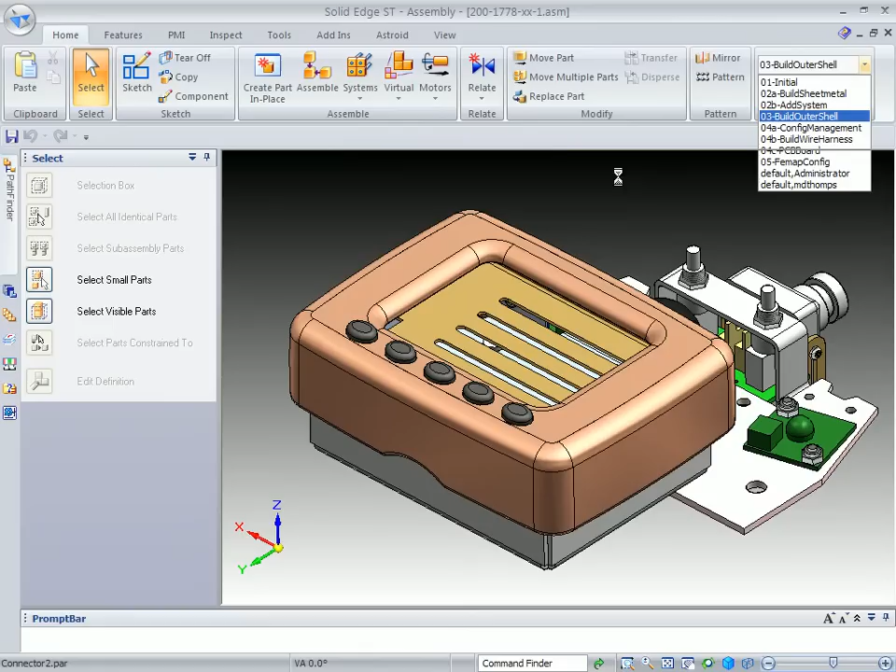The next portion of the demonstration, we're going to build the console cover for this particular unit. In order to do that, we're going to go to a configuration called Build Outer Shell, and we're going to use some of our surfacing techniques to actually build this particular design.

Here you can see it turns on several parts from the actual assembly. Then what we want to do is simply identify the console housing, and we'll in-place edit into that housing.

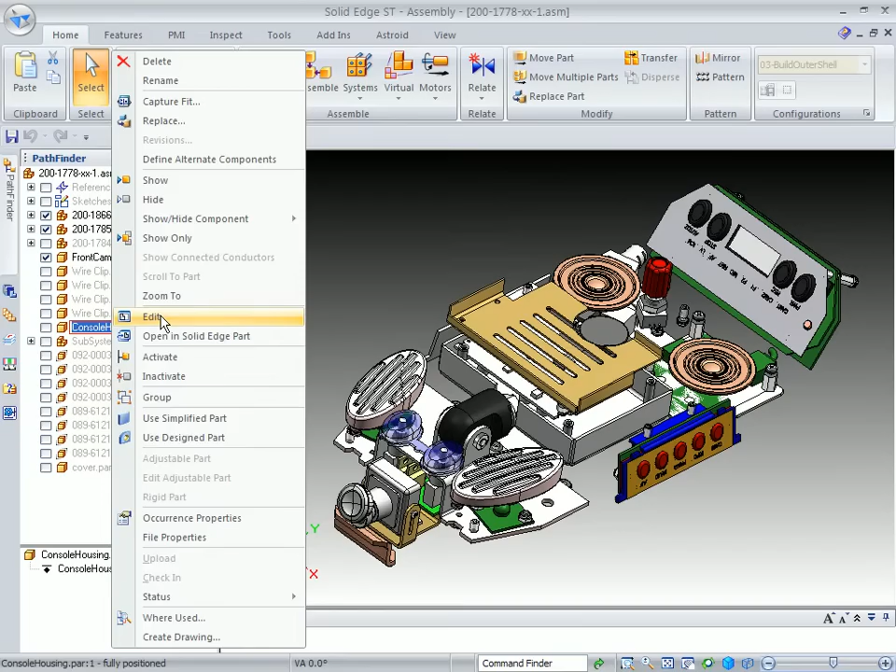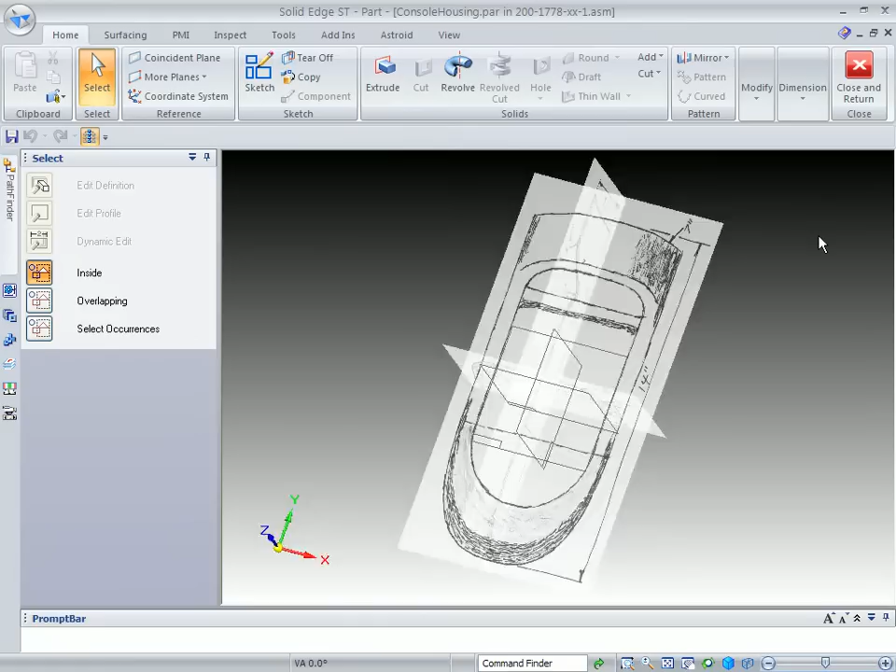Now when we do that, you're going to notice that we've got some industrial design sketches. If I turn off the background components, you can see them from a top view, a front view, and a right view. So he's got somewhat of an idea of what he wants this to look like, and we can go ahead and begin our design by simply creating the base feature.

In order to do that, we'll simply use a parallel reference plane and pull it down to this line to the front of the part here. It kicks us into the sketching environment where we will begin sketching.

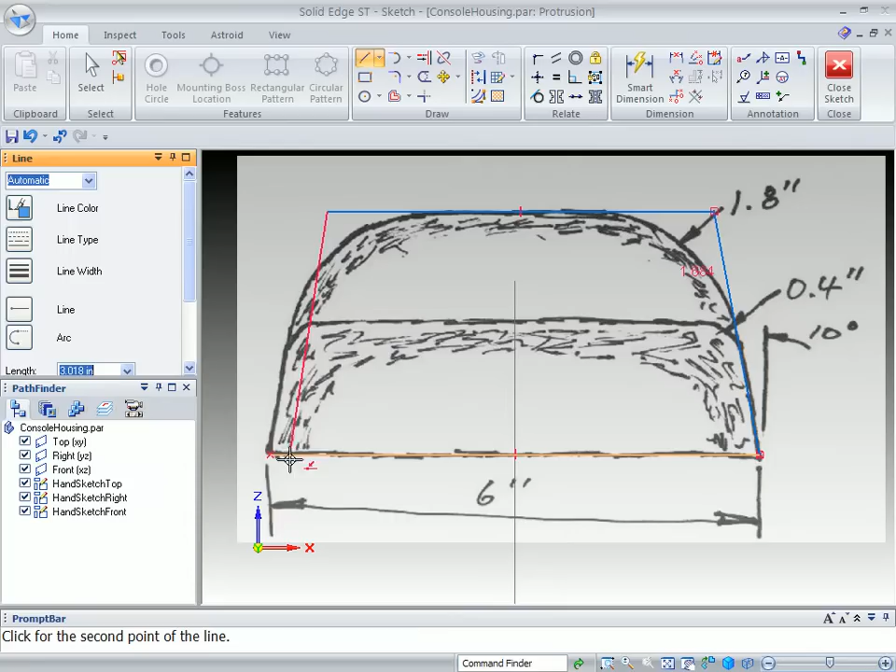What you want to do is get right on the reference plane and just come out to the end and start sketching what this part's going to look like. So you go to the endpoint to make sure you have a closed sketch. Then we can go ahead and lock in to midpoint, and start attaching some dimensions.

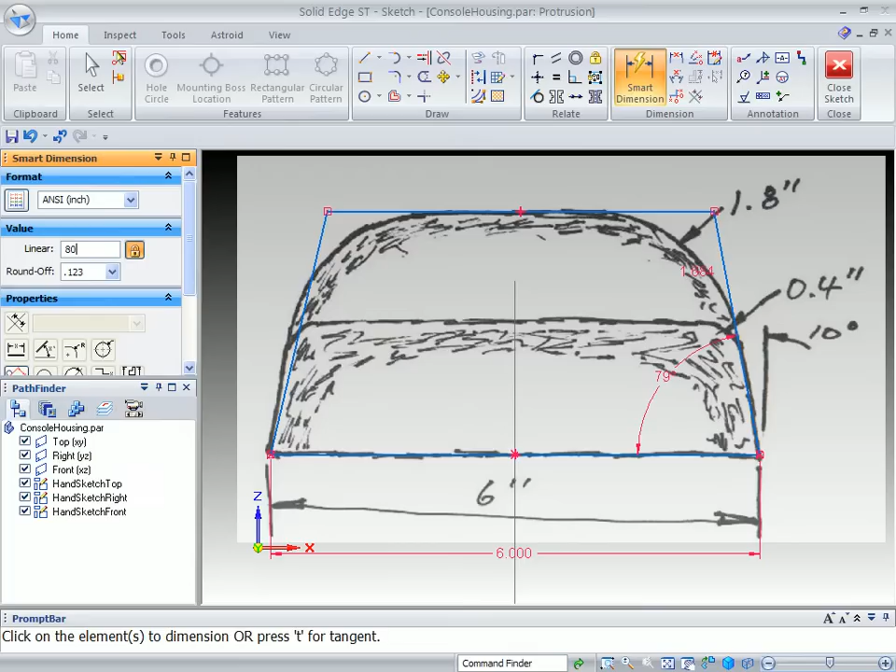We also want to add an angular dimension, and we can do that. And then we want another angular on the opposite side. Of course, there's a couple ways to achieve this in the sketch environment. And then we want to add a dimension to the side.

We'll go ahead and make that 1.8 inches. Once we have our sketch kind of roughed in, it takes us back to the top level, and we're going to go ahead and pull this up about, let's say, 9 inches.

Now that we've created that, what we want to do is come to a side view, and you'll notice that we also need to remove material from the side. For that, we'll use the cutout command. Again, these are just some general commands to get our shape kind of roughed in.

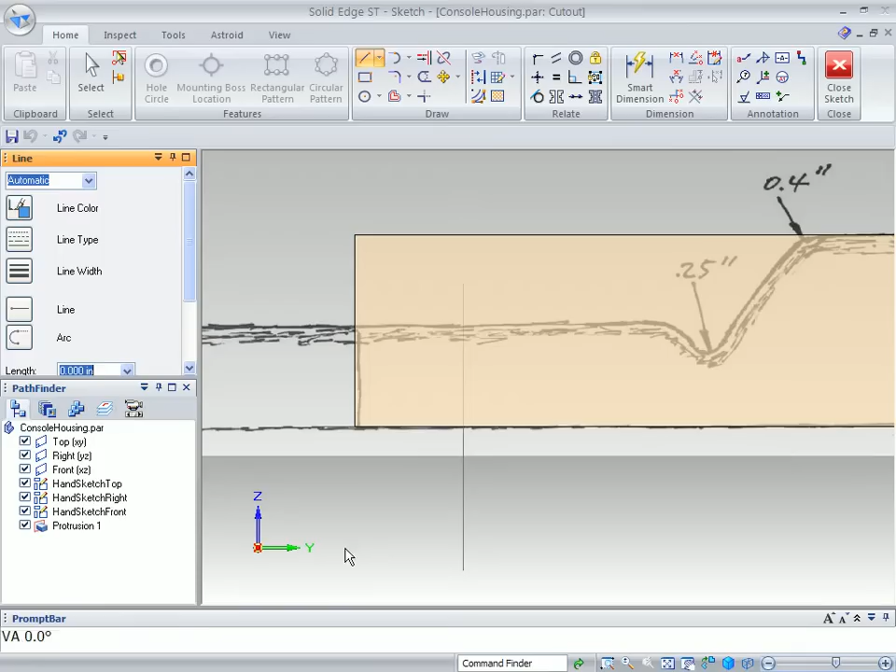Make sure you don't pick up midpoint here, just get point on and sketch your lines. What we want to do is remove material from the top half, and we'll use the through all option and put the arrow in both directions to quickly remove that information.

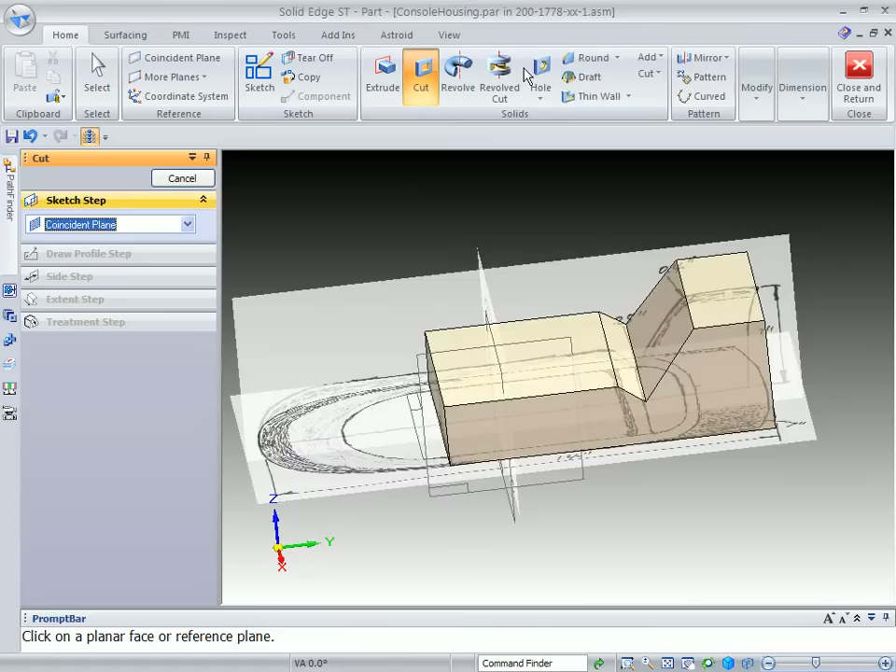The next thing that we want to do is add a couple of rounds. For this top round, we want this to be 0.4. Then for these bottom two, at least from the sketch, it shows a 0.25, so we'll go ahead and create those. And then we need to create 2 on the side, and those also need to be 1/4 inch, or 0.25.

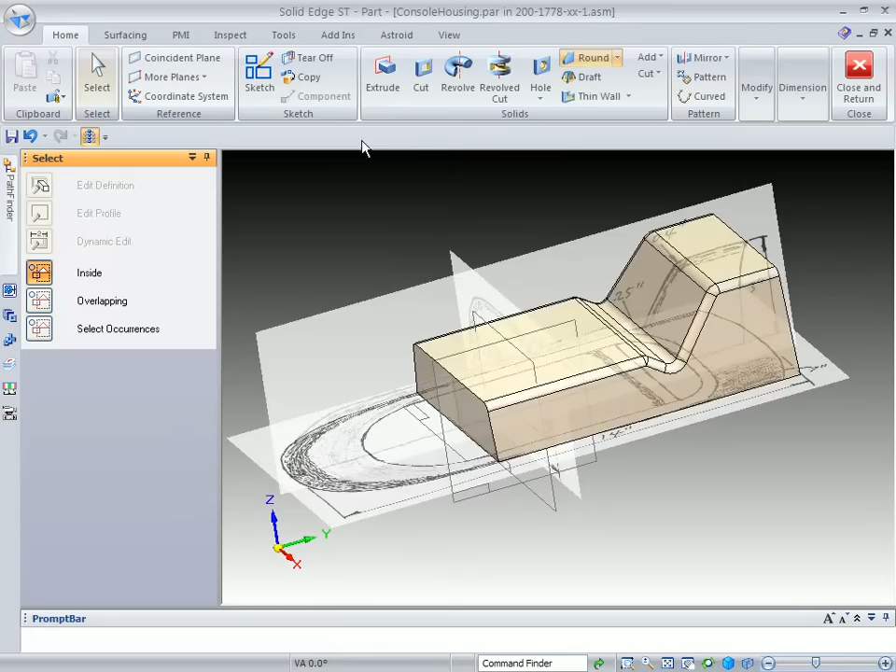This gets us very close to the general shape, and now as we take a look at the top view, we have somewhat of a bullet nose that we need to create here. In order to create that, we're going to use some curves and then BlueSurf to develop a surface there.

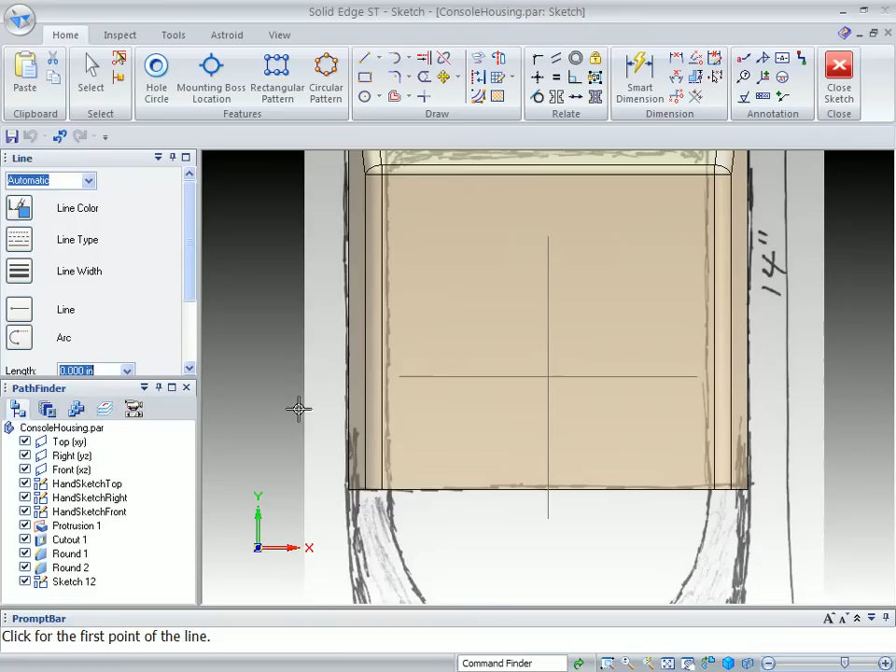So the first thing we'll do is use the sketch command to identify the top reference plane, and it takes us again into the sketch environment where we will begin sketching with the curve command.

What you want to do is first go to the outside. We'll get the endpoint, make sure you get endpoint, and then click a couple of times to place a couple of points, and then go down and get the midpoint, and then want 2 points on this side, and then go up and pick the endpoint.

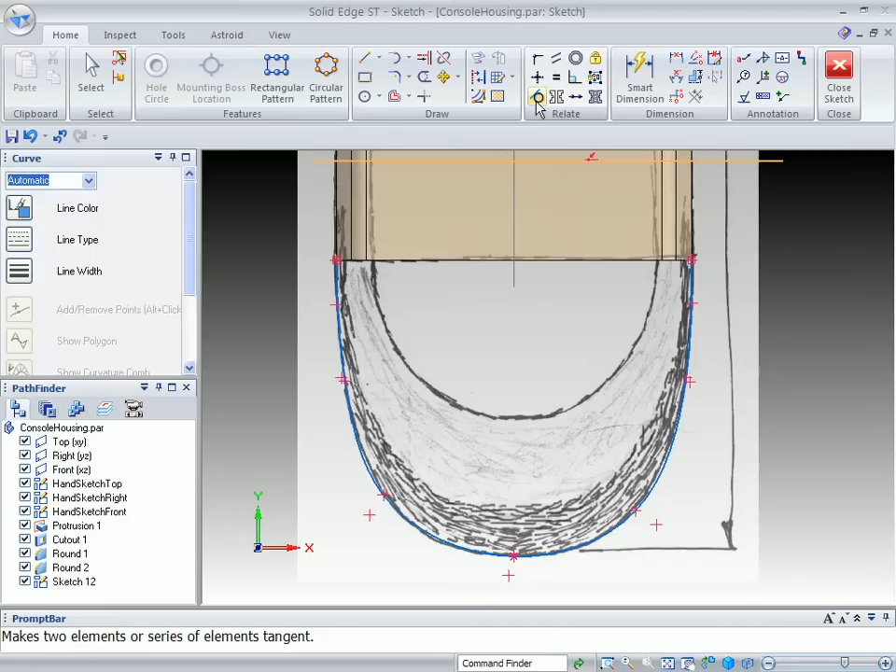The next thing that you'll want to do is use the tangent option to make sure that these lines are tangent and nice and smooth.

Then what we're going to do is pick up not the control vertice, but the control point on the line, and draw a line between those 2 control points.

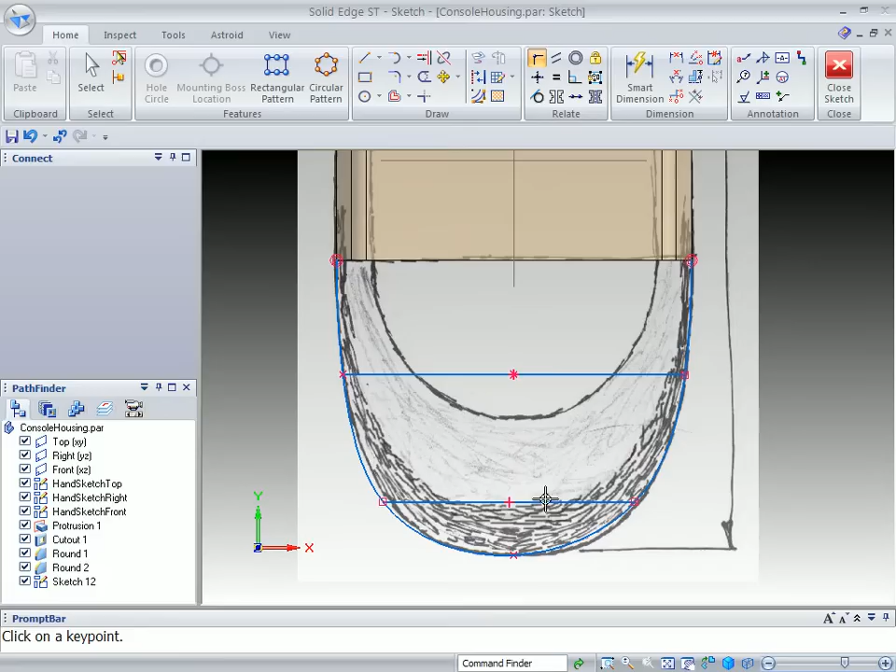For the 2 lines, then what we want to do is use horizontal vertical, and then point on to get midpoint to the center on both lines very quickly. And you can see that develops a nice curve, and it should be tangent.

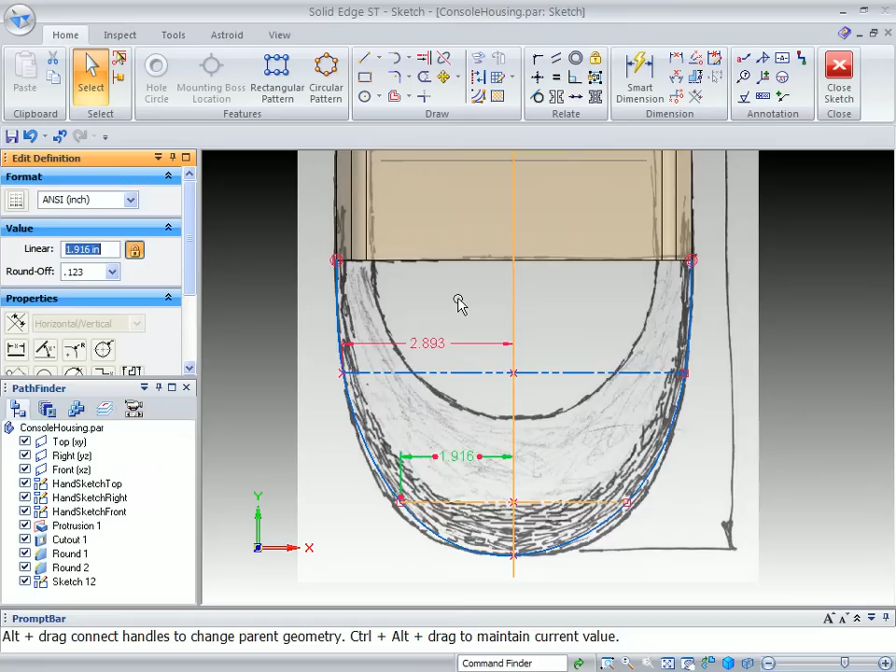We also want to convert these lines from lines to construction, and then we can easily place a dimension just to show you that it is indeed tangent. So for example, if I take and scroll this, you're going to see that it is symmetric on both sides. Okay, so that looks good.

So what we can do is go back and go ahead and begin developing the next shape.

For this, we want to use parallel off of the top reference plane, and we want to come and pick up the bottom arc. So if I zoom up a little bit, you can see it better, and I'll pick up that end point of that arc.

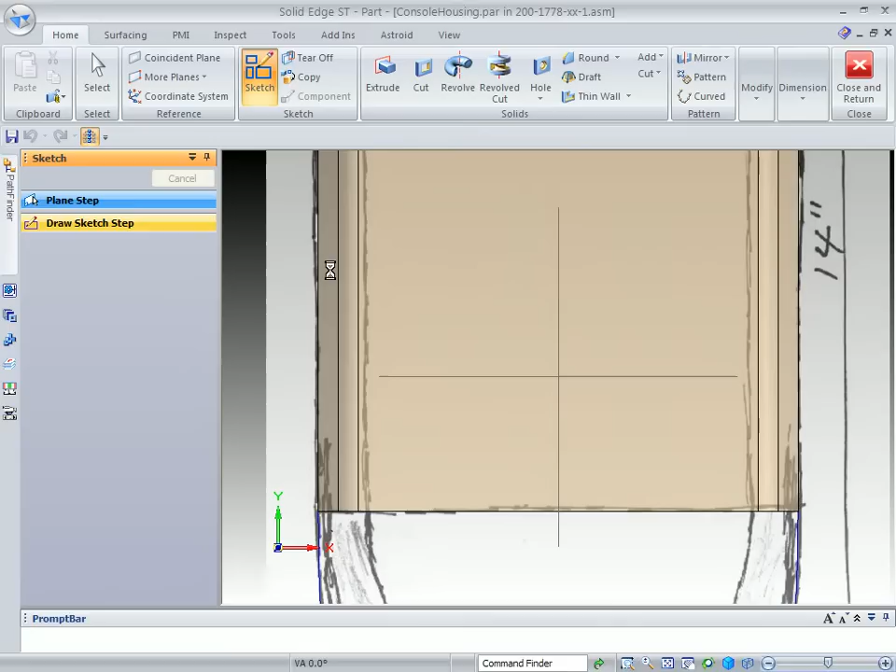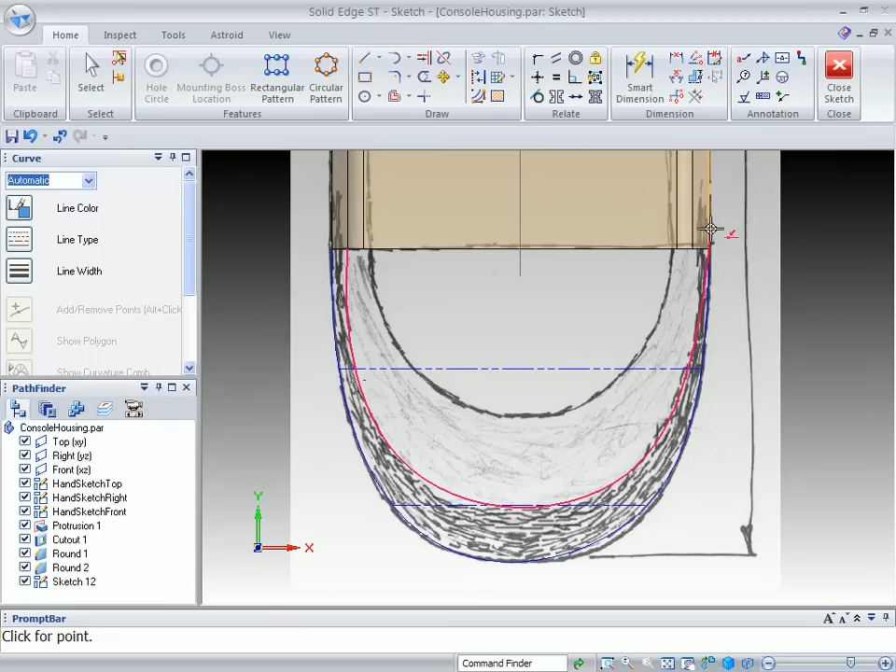And basically we want to repeat the steps that we just did by picking up the end point, 1, 2, 3, 4, and then another end point. Then what we want to do is get these tangent,

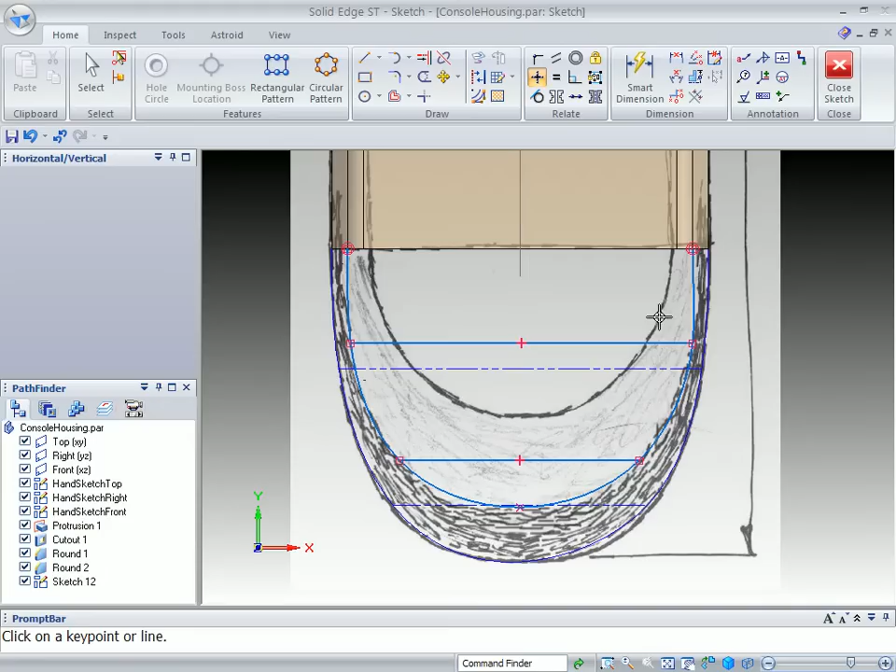and then we want to develop from the control points 2 lines as we did before, and then we want to make them horizontal vertical to make sure this is concentric on both sides, to each side, and then we want to convert those.

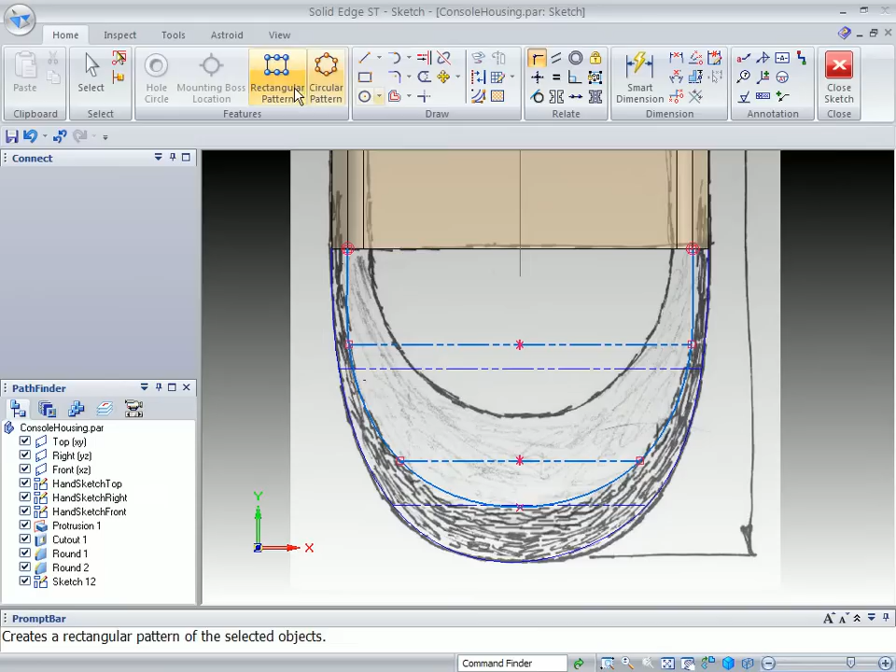And just to show that they are concentric, if we move them, you can see - oh, well, one thing we forgot to do is do the point on to center, and then they will be. So now when I grab that end point, you'll see they both move as it should.

Okay, so that looks pretty good. Now we can go and create or develop the third curve, and for this I'm going to just identify this top face, and for this particular curve I'm going to use the tangent arc command.

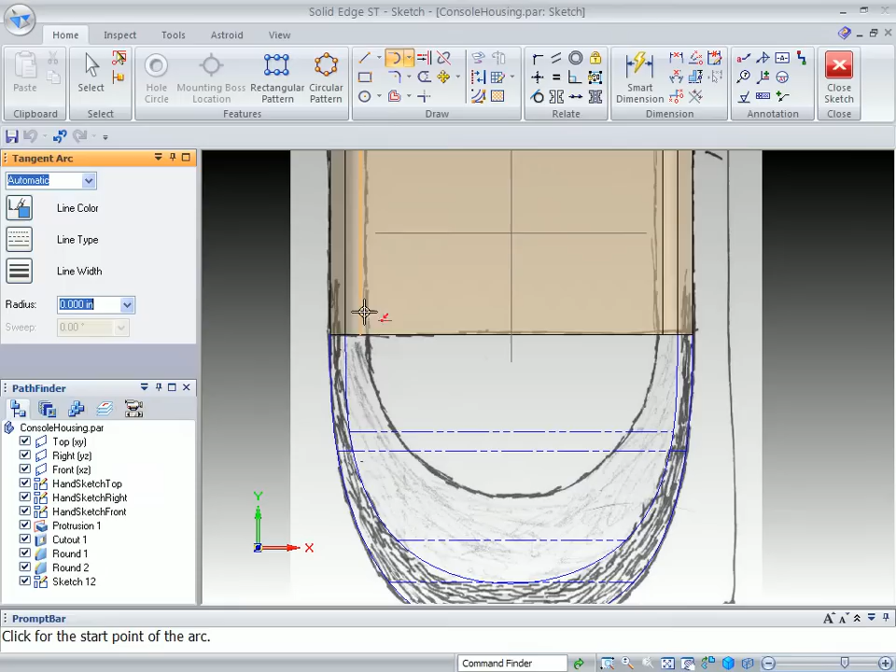Make sure you get the end point, and again get the end point. Then what we can do is simply select the curve and convert it.

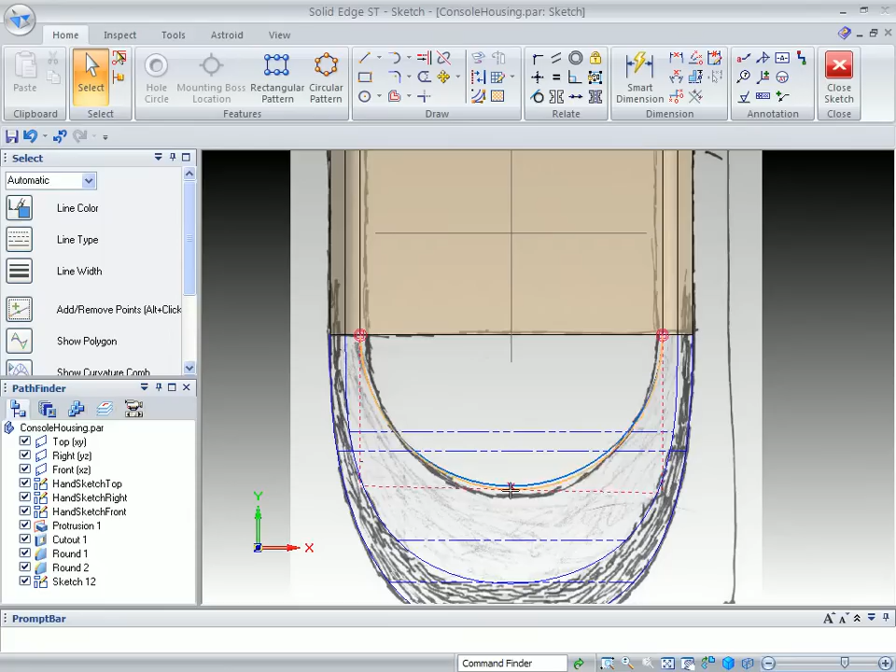We also, if we want, we can make sure that this is in midpoint. You can see that when I select the curve that it is indeed in the center. And so now we've developed our 3 guide curves.

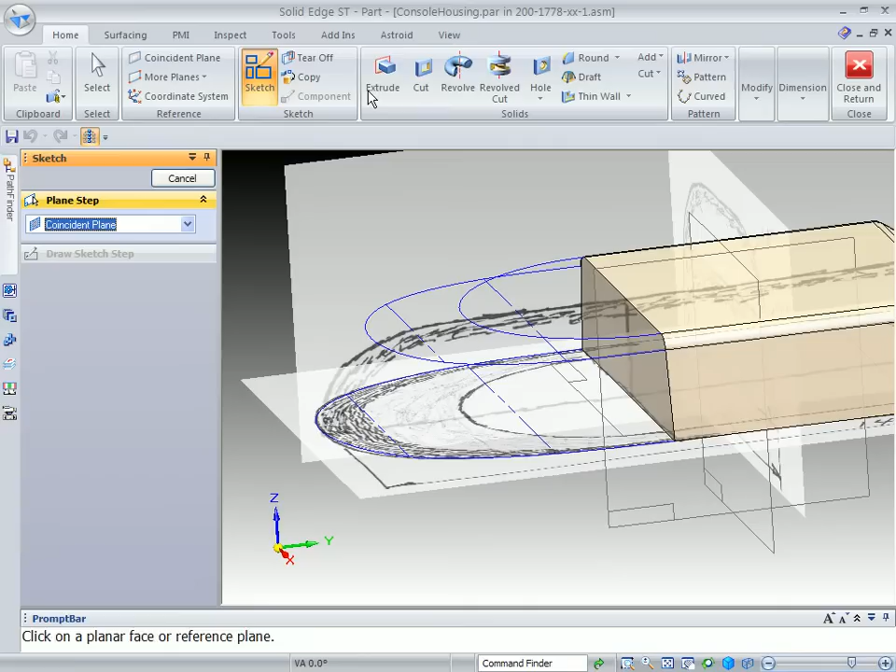The next thing that we're going to create is the curve down the center that kind of gives us this particular shape here. In order to do that, we're going to create another sketch off of the right reference plane.

And then I'm going to rotate it a little bit and use the curve command again. This way we can pick up the silhouette points.

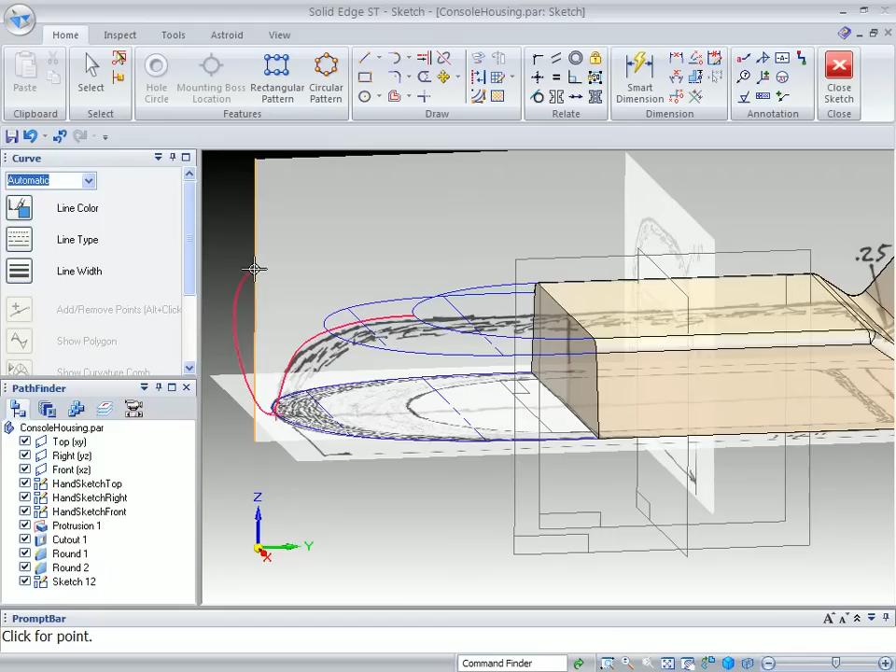Want to make sure you get the silhouette point. And then once we get the silhouette point, we also want to make sure it's tangent to these faces.

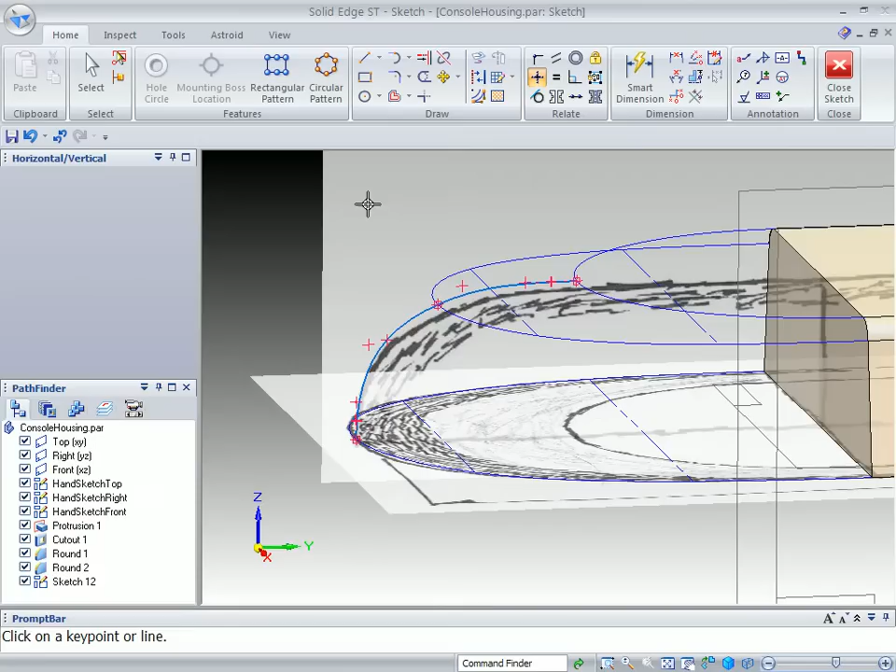So what I'm going to do is just basically identify the control vertice and make sure that they're square to the front and the top face. Then we can close and return back to the top view.

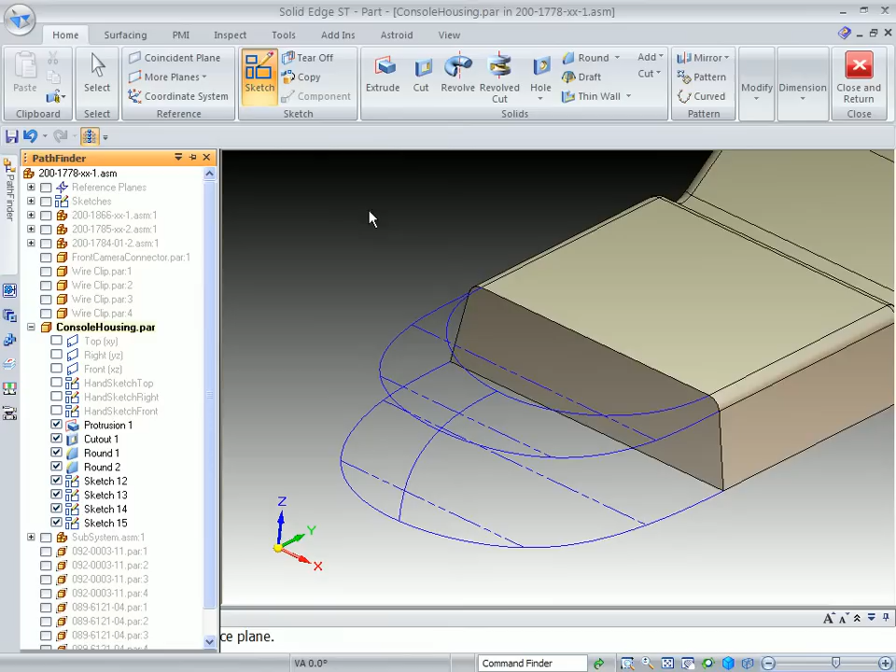Now what I'm going to do is simply turn off these sketches so that you get a better idea of what we're creating here. Then we can go and use a command called derived curve, where I can pick the bottom curve and accept it.

And then I also want to do a chain on this top one. So this whole front face, we're going to derive the edges from that face. That way we can use it in the BlueSurf command.

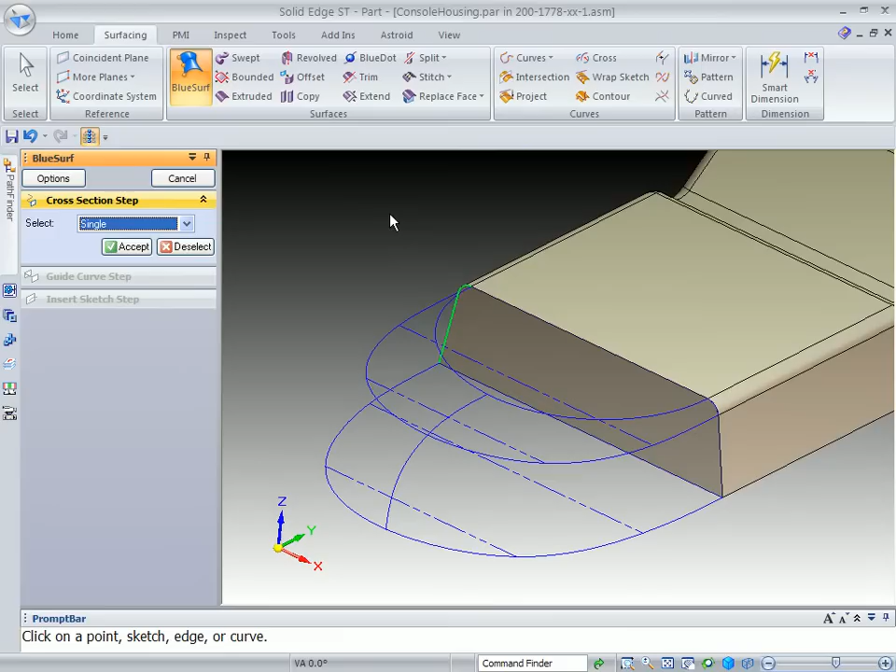I'm going to switch to single and simply select those 2 curves and then pick the bottom here. And then I'm going to come over and select these 2 curves, and then you can see that's going to quickly develop the first shape that we have.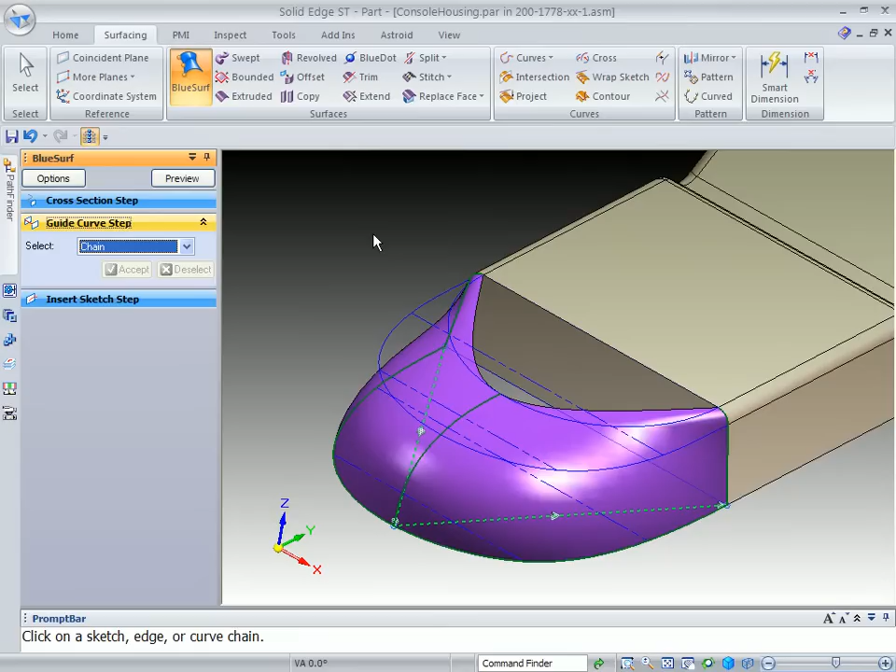Then what I'm going to do is go to the guide curve step, where I'm going to start selecting first the bottom curve and accepting it, and you'll see the shape update, or the surface update, to those curves as I identify them.

And there you have the shape that we're looking for. The next thing that we need to do is the bounded surface command to identify both curves on the top to close this surface out.

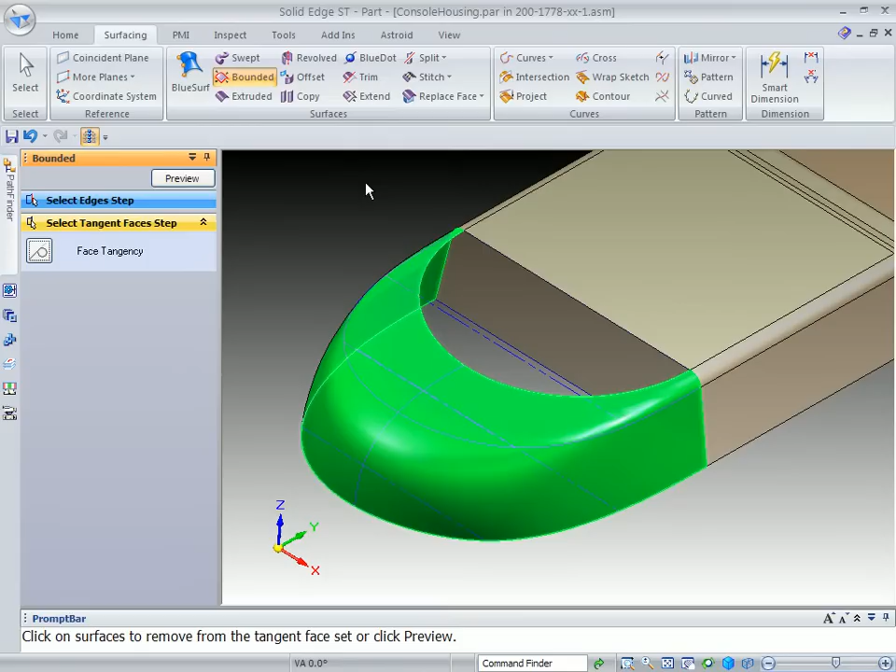And then we're going to do the same on the bottom. Once we've finished that, we want to go ahead and Boolean this, but before we do that, we actually need to stitch it by just fencing it in and accepting it.

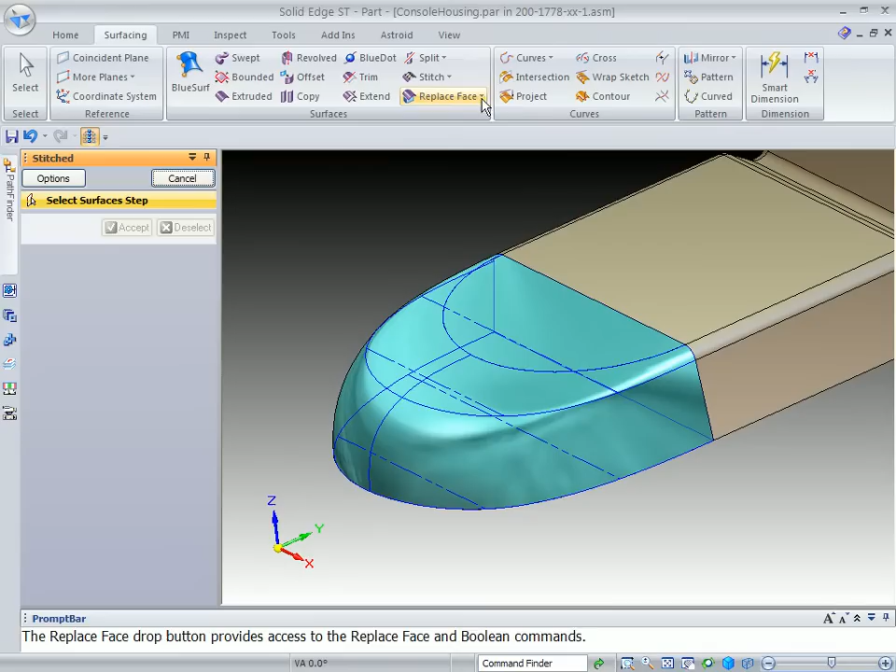Then we can use the Boolean operation and make sure you select the Unite, and it's going to go ahead and add that information in.

Then we can hide our sketches and also our curves. So you can see how easy it was to develop that using BlueSurf, and all we had to do is basically set up our curves.

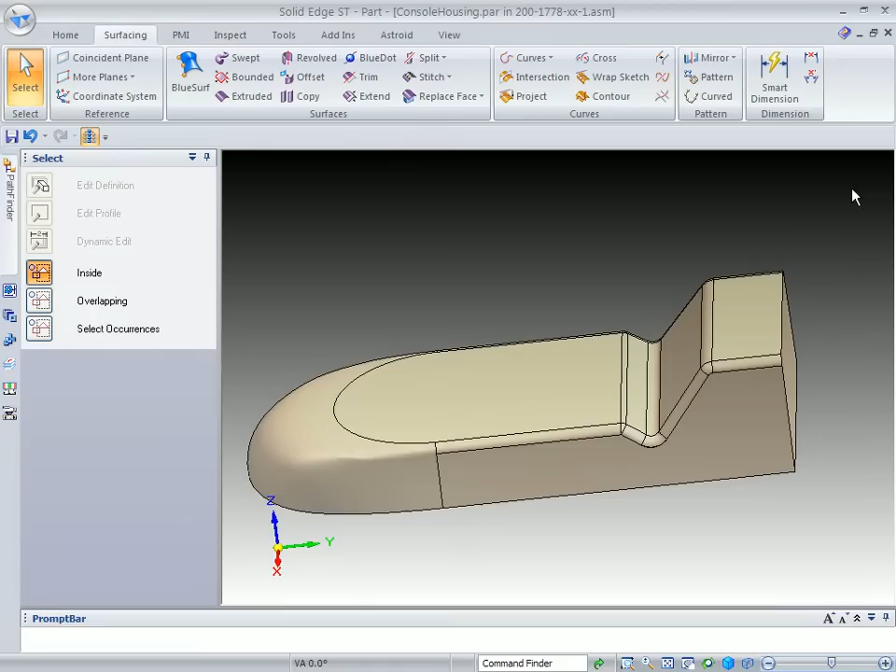The final thing that we need to do is come back over to one of the hand sketches here, and you're going to notice that the back side has a little bit of a curve to it. So what I'm going to do is go ahead and create another sketch, our final sketch of the day for this particular part anyway.

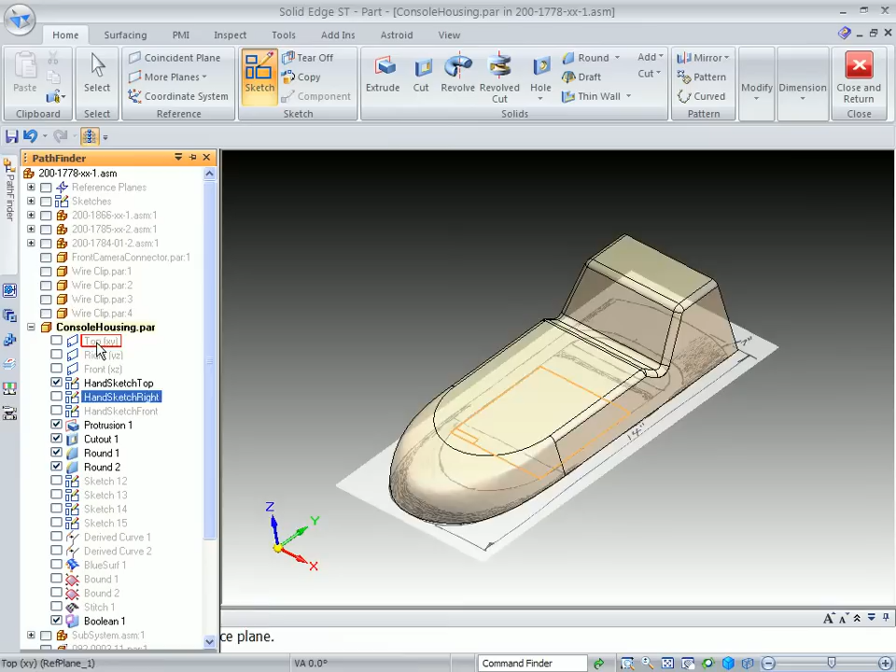Go to the top view, use arc by 3, and basically get an arc that's just a little bit above the edge here. And then what I want to do is go ahead - and it does show that it is a 7-inch arc, so make it 7,

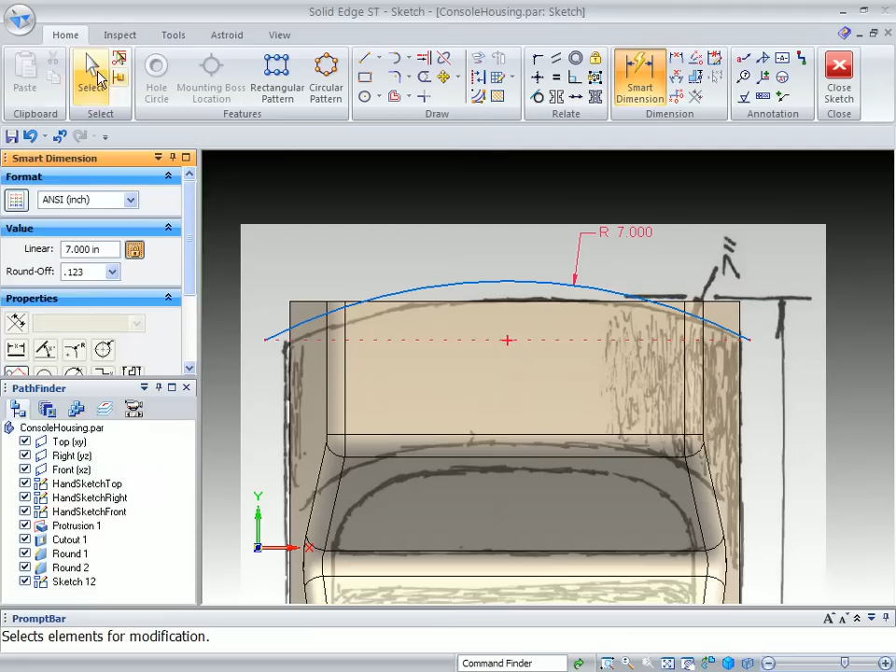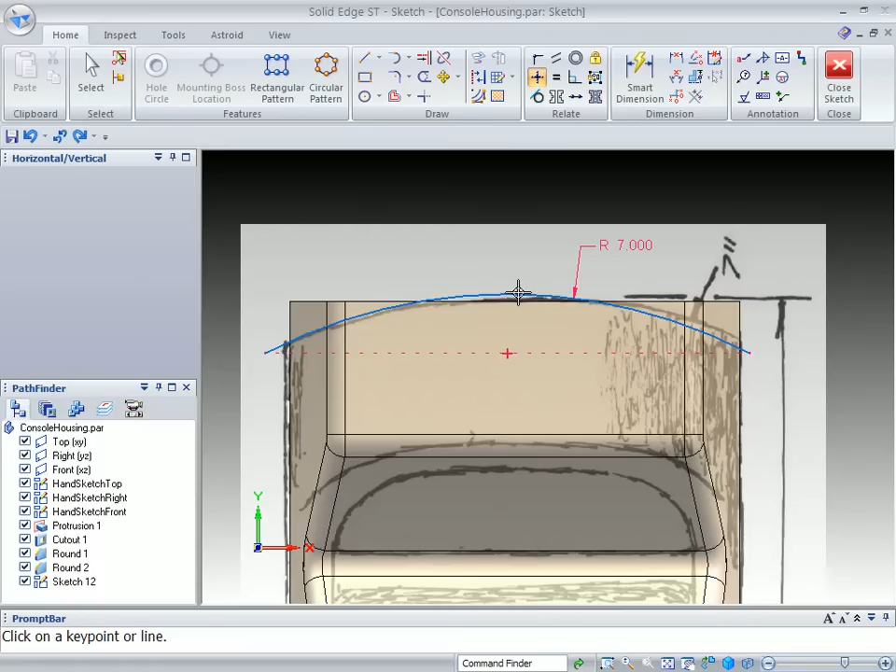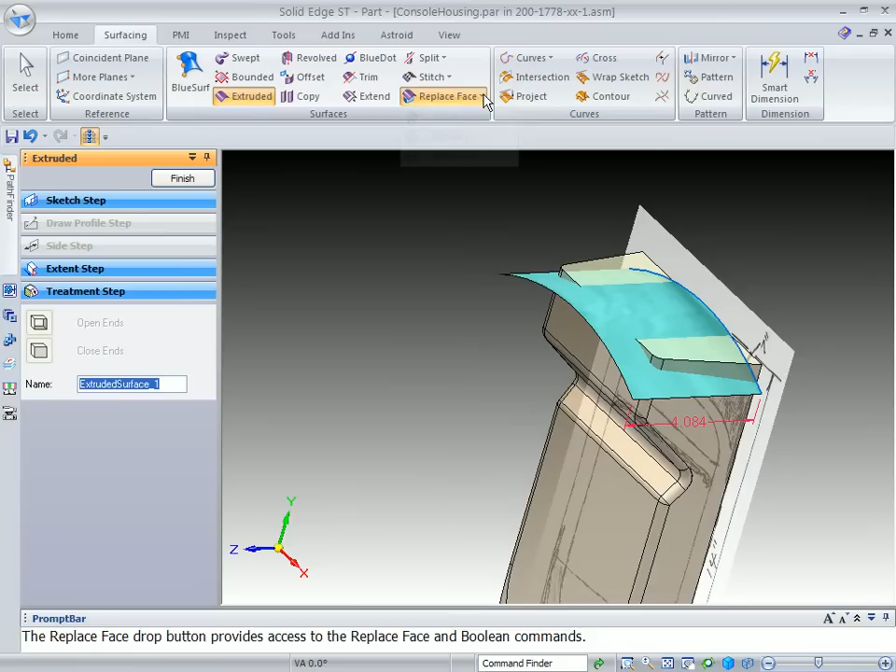and then close out. Now once we've developed that, then we can use the extrude command from sketch and just simply pull that face up. And then what I'm going to use is the replace face command to select this back face and change it to the surfaced face.

So again, a nice command that allows you to replace the surface. So at that point I can go back and remove or turn off the sketch.

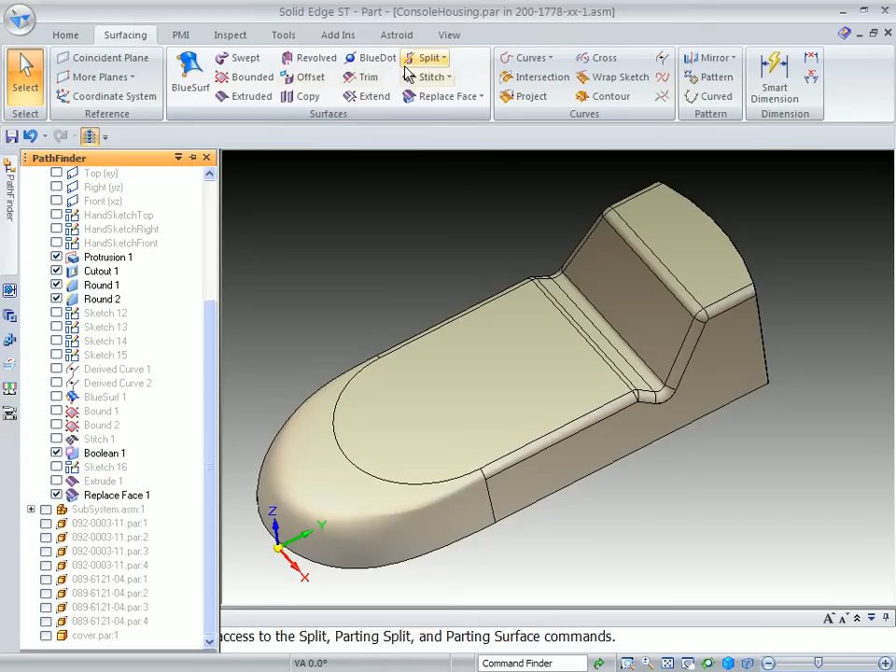And then the final thing that we want to do is to go ahead and add a round on the back side, which is going to be, again, 1/4 inch.

And then once that's done, we're ready to shell out the material so that those components can fit inside. And again, we're looking for a 1/8 inch

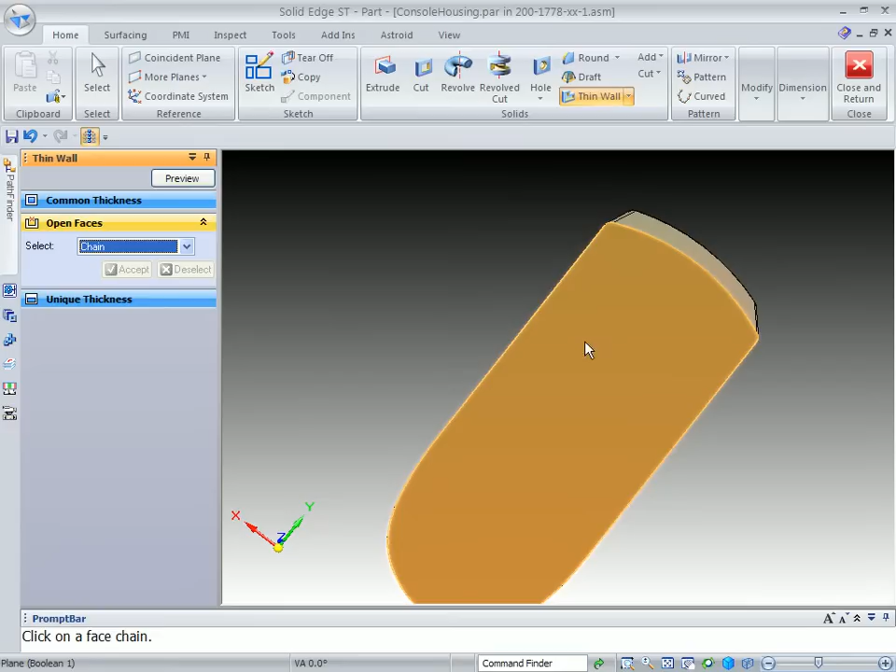thin wall. And then we switch to single operation because I also want this back face to be thin walled out, and very quickly we can develop the shape that we're looking for.

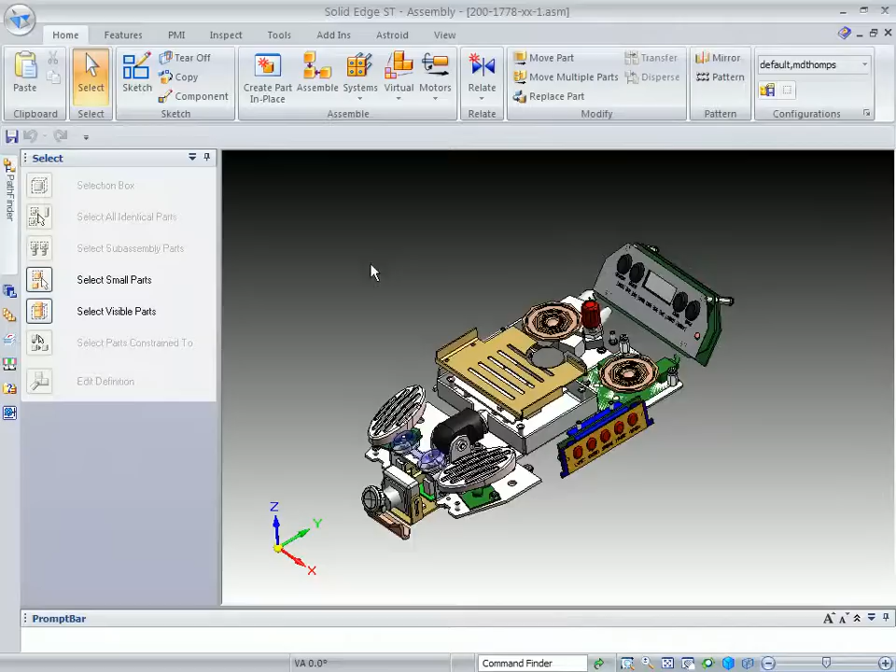And if I turn back on the design, you can kind of see how those components fit within this particular model. When I close and return back into the assembly, we turn that model on, and again it gives you a better idea of what we have.

Now we still have some holes that we could create very quickly off those faces by including edges from those parts, but this gives you a general idea of how powerful our surfacing capabilities are in Solid Edge with synchronous technology.